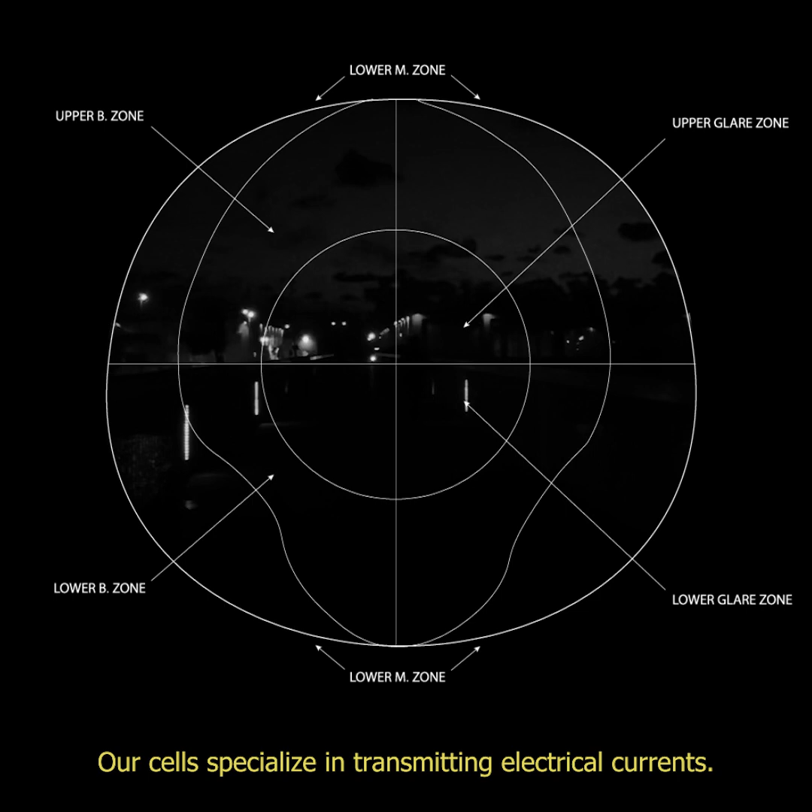Electricity is everywhere, among other things in the human body. Our cells specialize in transmitting electrical currents. Energy pulsates within us and makes up everything around us.

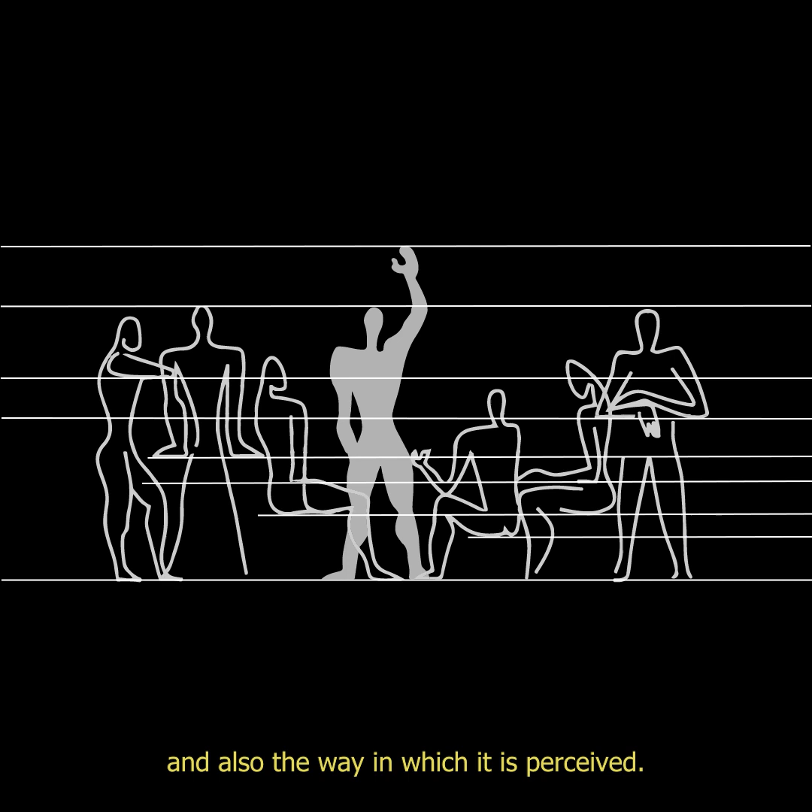In a world where energy is always available, the human body has become a benchmark for planning. The available energy changes the architecture and also the way in which it is perceived. It did not only change the status of architecture, but made it first and foremost the carrier of energy movement in the world. It changed the perception of space, the perception of the city, and our human shared perceptions.

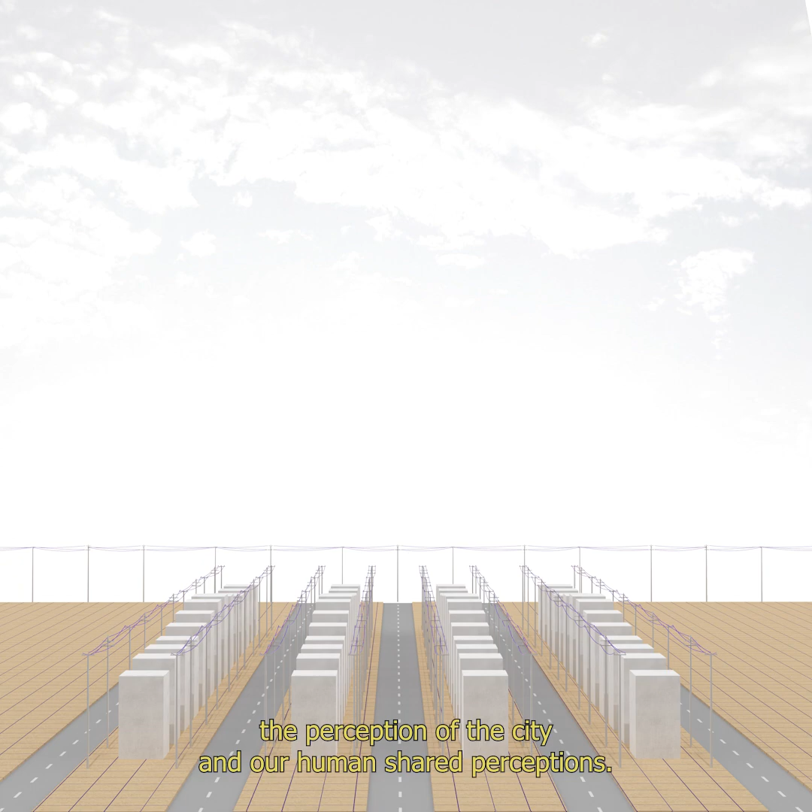Power station: the space in which energy is produced industrially. The Israeli power stations can be simulated as a ring of energy. The power stations stream their output energy to any random point of consumption, carrying out the production-consumption equation. The power station is losing its spatial importance and could eventually become a gap in the urban scene.

From the east, the Yarkon River flows, and from the west, the coastline. From the north, an urban neighborhood in renewal consists of 16,000 units, along with massive construction of employment and trade centers. Reading's future as a museum, the massive urban renewal, and the river connecting to the sea all lead to the creation of the osmotic power plant.

We are now in the planning capsule. From here, through screens, we will control the energy established spaces.

As fresh water and salt water meet, a natural process of osmosis takes place. This process happens naturally in the Yarkon estuary. Large and useful amounts of energy can be produced as a result of the friction point between fresh and salt water.

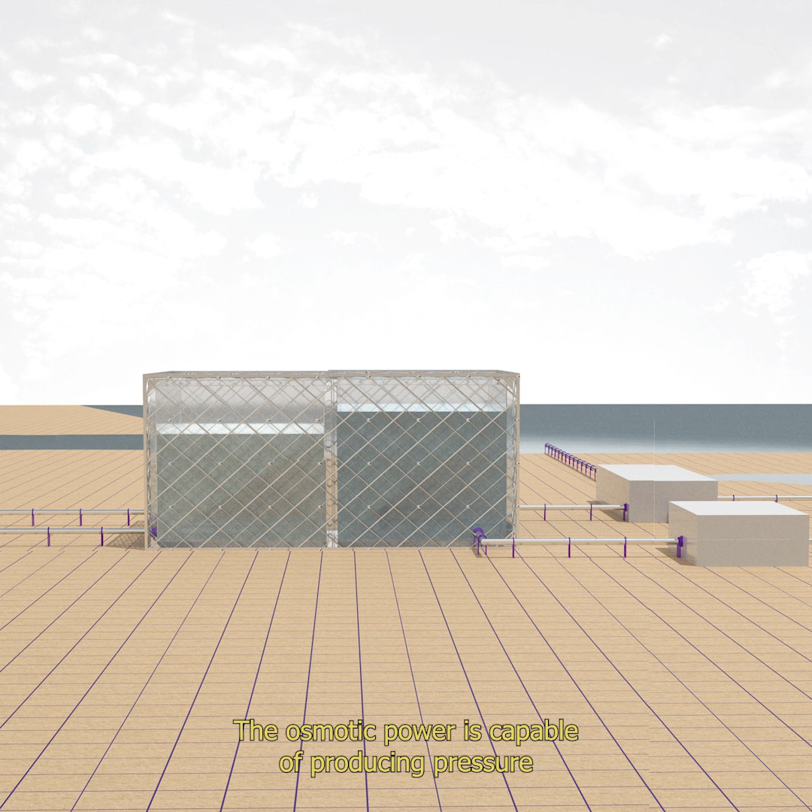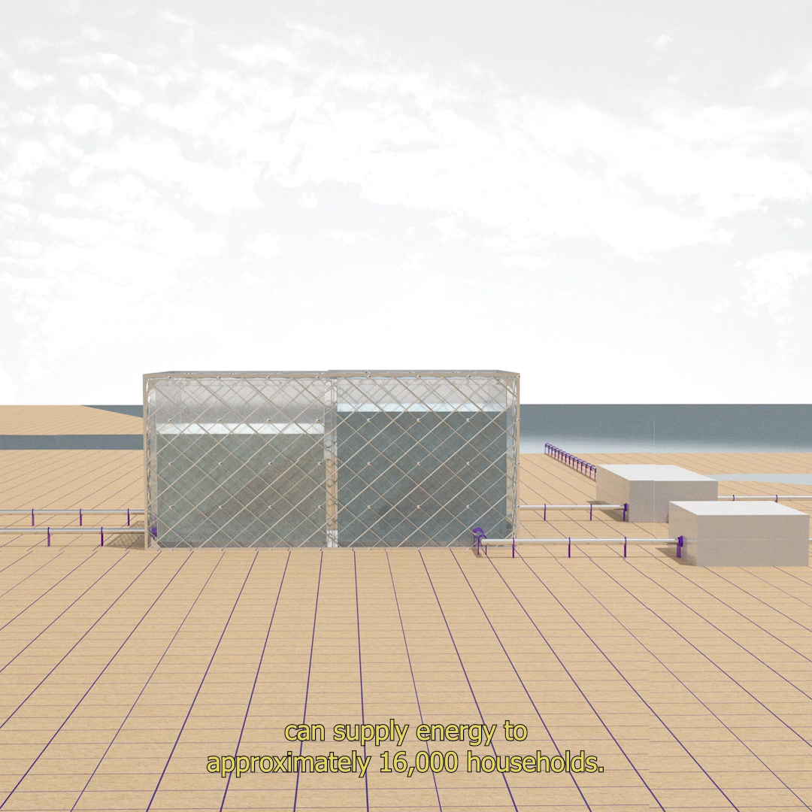The osmotic power is capable of producing pressure that can drive a turbine to produce electricity. An osmotic power plant with an area of 3,500 square meters can supply energy to approximately 16,000 households. The new osmotic power plant includes cycles of water pumping, assuring their return to nature.

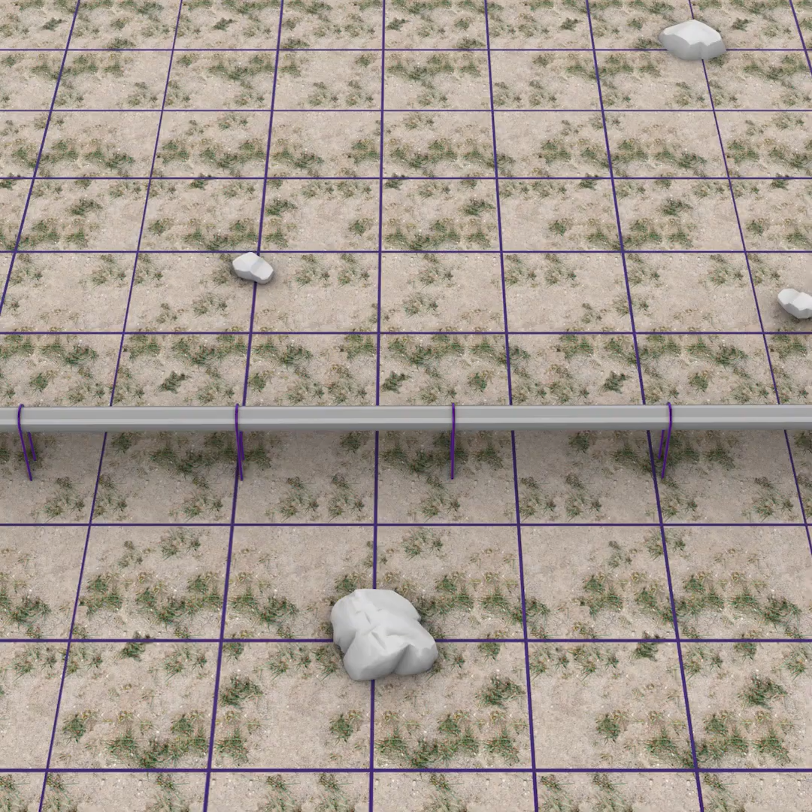Water is being pumped out of the Yarkon River. It flows to the first half of the osmotic plant's volume and a few meters away returns back to the river. At the same time, water is being pumped from the sea with a salinity of 3.7%.

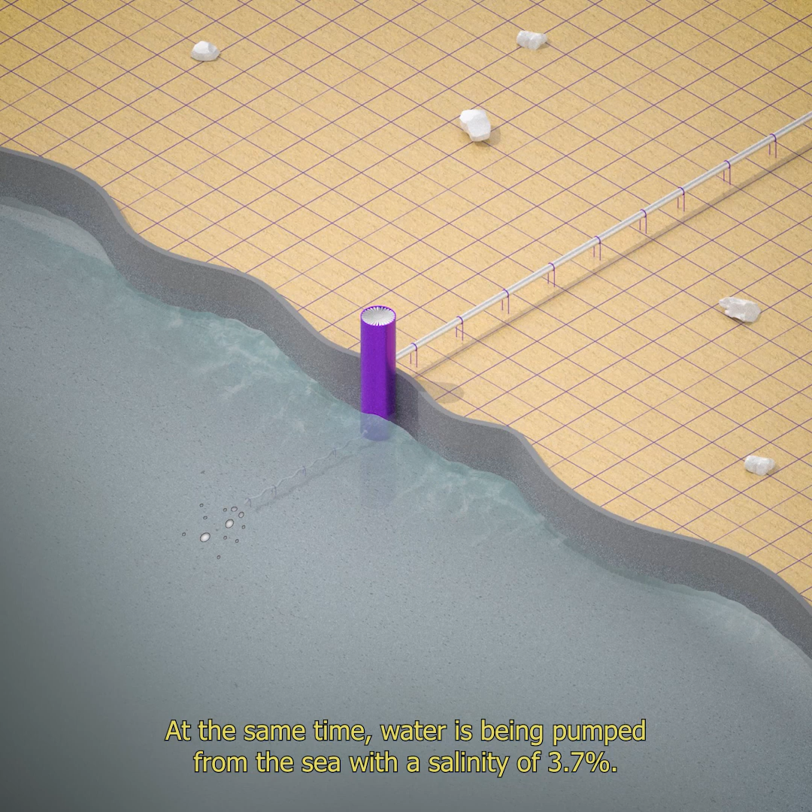The electricity that has just been produced is now part of the national distribution chain. There is no storage of energy. High voltage is now ready for distribution. Back to the planning capsule.

The industrial landscape and the production history of the buildings both play a central role in the redesign of the complex. The planning emphasizes the immediate urban and civic context, from a structure of machines to a space of human production. The building consists of numerous levels and raised floors.

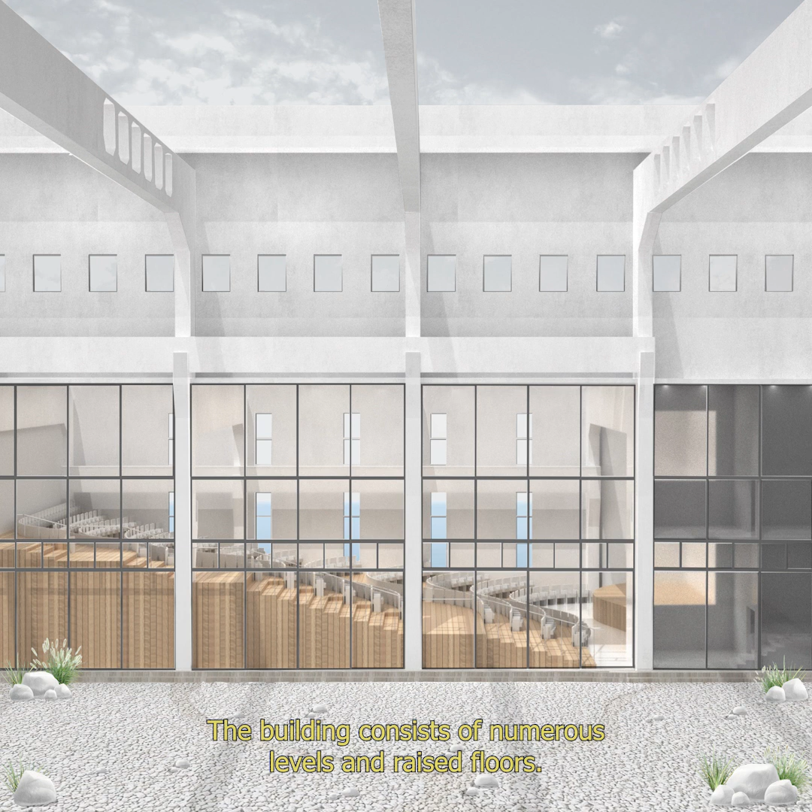The geometry of the rectangular volumes makes it possible to produce a new design that involves internal and external moments, along with different civic programs such as display, exhibition, and performance. The two historic buildings are separated but still manage to retain mutual industrial relations.

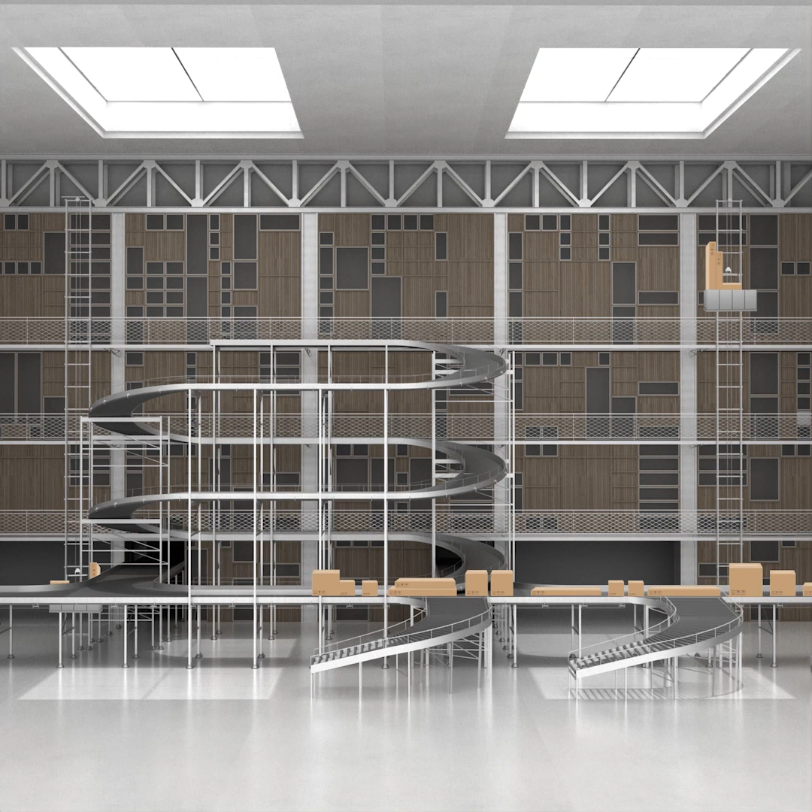Today, the movement of people, goods, and things happens in reciprocity. Through the passageway, you can reach the work and production spaces and move from Building A to Building B. Many goods flow through the back entrance of the Building B building, including unloading of materials, transporting them indoors for storage or use, and finally providing civic storage in the hectic city.

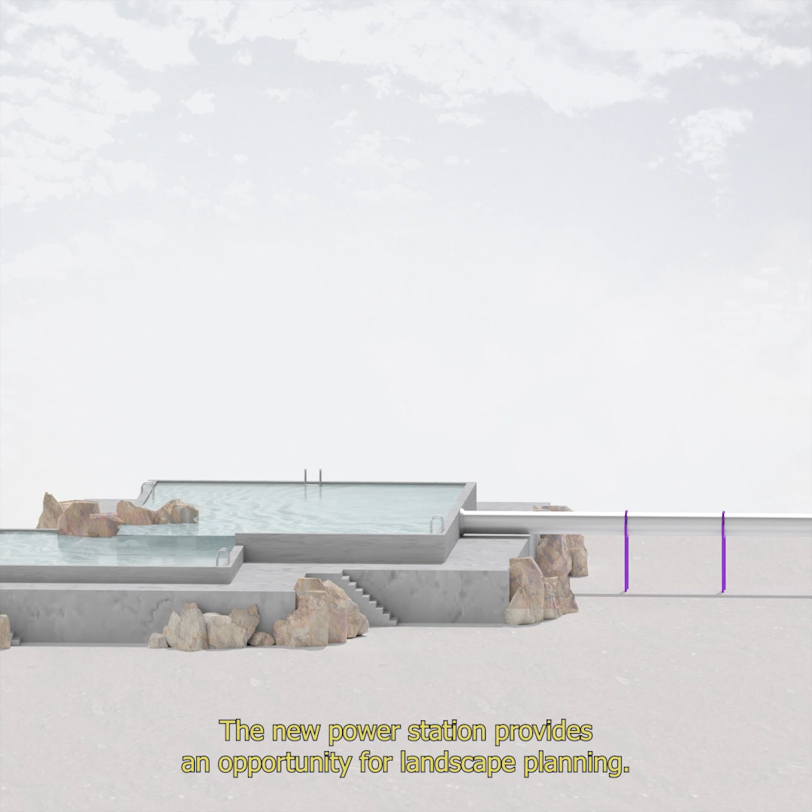The new power station provides an opportunity for landscape planning. The water pipe coming out of the turbine structure contains high water pressure. The water pressure breaks down in the transition between pools of clean water. The end of the factory and the beginning of nature.